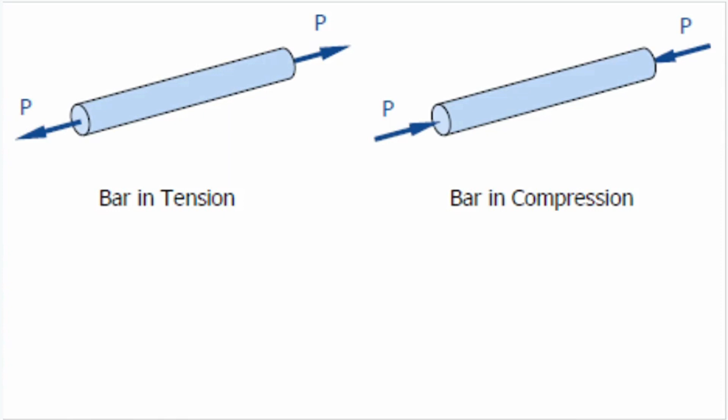But what's buckling? Buckling refers to the sudden and often catastrophic failure of a structural component when subjected to axial compression. This phenomenon is encountered in a variety of mechanical systems, from thin-walled structures to columns and pressure vessels. Buckling can be characterized by sudden deformation and large displacements.

The deformation that buckling can cause does not always result in yielding or fracture, but buckling is still considered an important failure mode to consider, because once a member buckles, it is unable to support the load it was designed to support.

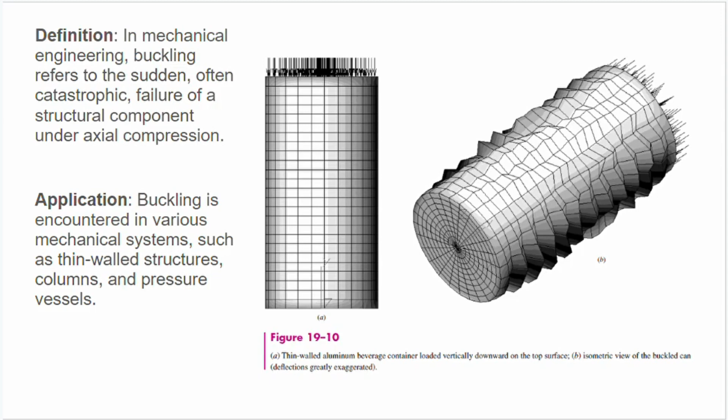Train tracks can buckle in high temperatures because as the metal expands axially, the tracks are constrained, which applies a compressive reaction force axially. The train tracks may buckle under this compressive force.

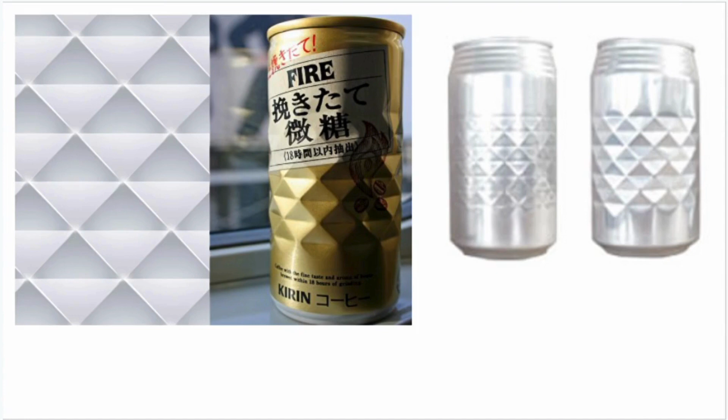Diamond cut cans are manufactured thanks to buckling. Fun fact, due to the equalization of pressure, the pattern becomes more distinct when the can is opened.

The primary cause of buckling is axial compression, where a component experiences compressive forces along its axis. The critical load at which buckling occurs is influenced by both the geometry of the component and its material properties. Additionally, imperfections such as geometric irregularities or manufacturing defects can accelerate the onset of buckling in mechanical systems.

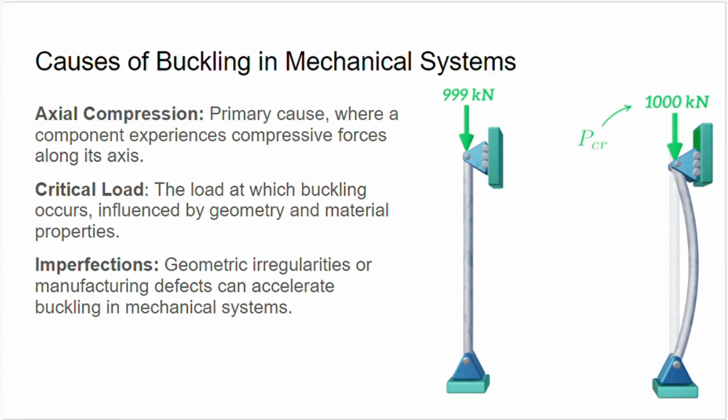Euler's buckling, named after the Swiss mathematician Leonhard Euler, is a fundamental theory in mechanical engineering that addresses the stability of slender columns or structures subjected to axial compression. This theory assumes an idealized scenario where the material is homogeneous, isotropic, and the column is perfectly straight without any initial imperfections.

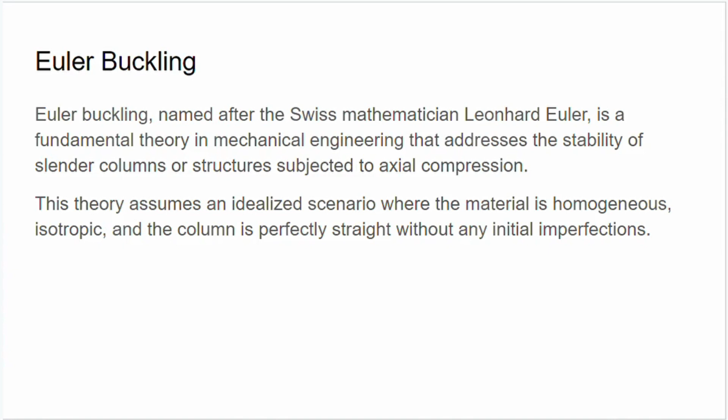Euler buckling critical load formula. The critical load, P critical, in Euler buckling theory, is determined by the formula P critical equals pi squared times E times I over K times L squared, where E is the modulus of elasticity, I is the moment of inertia, K is the column effective length factor, and L is the length of the column.

This formula is pivotal in Euler buckling theory as it defines the point at which a slender column transitions from stable to unstable equilibrium. We use this to ensure mechanical components are designed with sufficient stiffness and material strength to prevent buckling under expected loads.

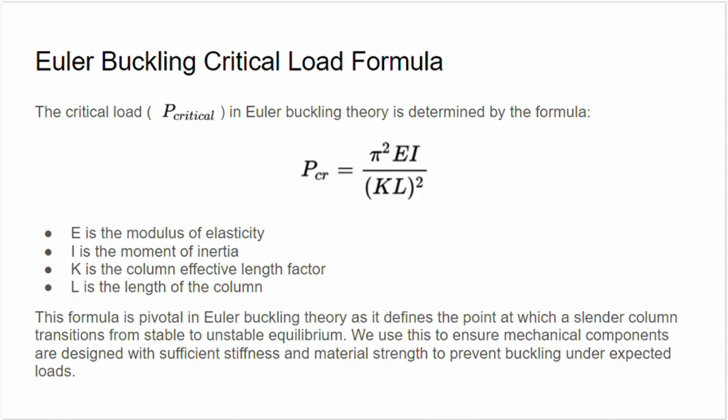But what's the effective length? The effective length, LE, is the distance between inflection points on the deflected shape. For the column with fixed and free ends, the distance between inflection points is twice the length of the column, so the column effective length factor, K, is 2. End connections make a huge impact on the critical buckling load and must be considered thoroughly.

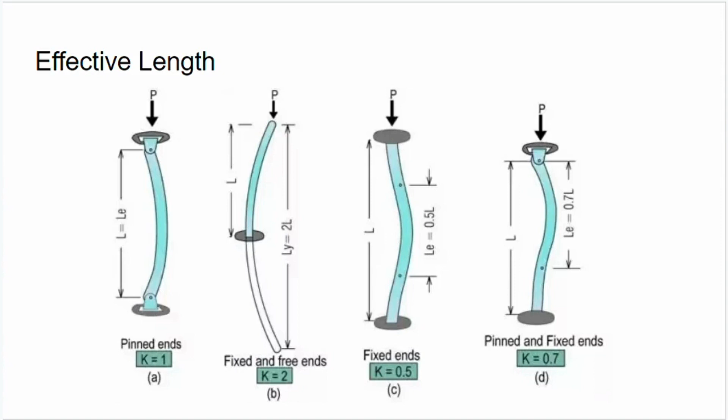FEA application in buckling. As mechanical engineers, the role of finite element analysis, FEA, becomes paramount in understanding and mitigating buckling.

FEA allows us to simulate and analyze the behavior of mechanical components under varying loads, helping us predict the critical loads at which buckling may occur. Moreover, it provides a powerful tool for design optimization, allowing us to create structures that are not just mechanically sound, but also optimized for stability and performance.

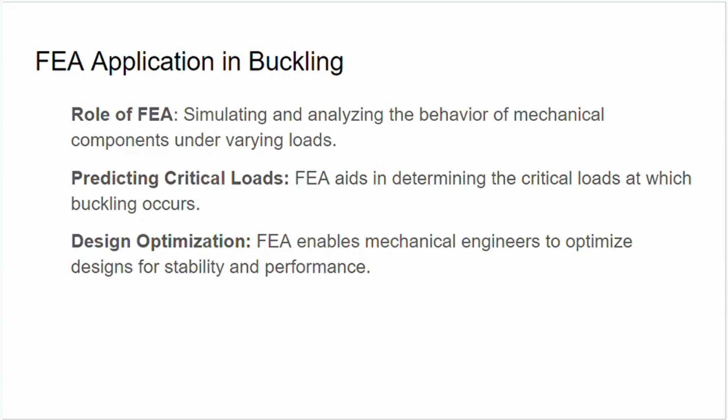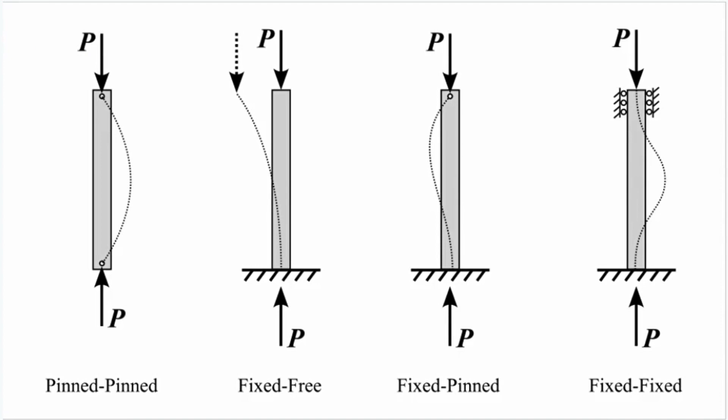So let's see an example in SolidWorks. We will be evaluating the fixed free column in FEA, as seen here, with one fixed end and one free end where the load is applied.

First, you'll make your part. This column is 0.03 meters in diameter and 2.55 meters long. It's a pretty thin column, but it's the one we'll be evaluating today.

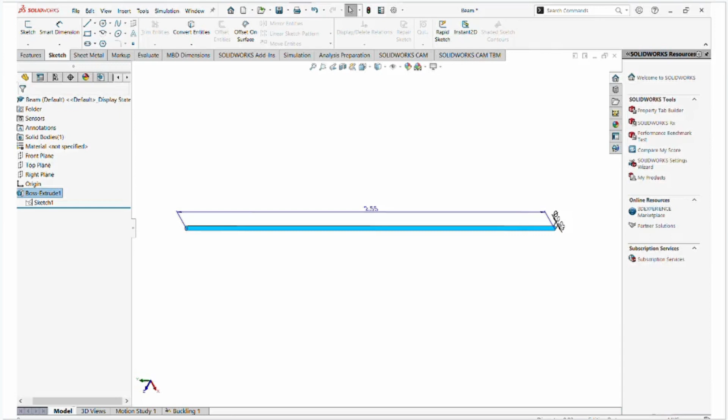You'll then want to create a new buckling study. You'll go to the Simulation tab, click New Study, and then do a buckling study. Click that green check mark.

Similar to a frequency study, we may want to analyze more than one buckling mode because there will be multiple modes that buckling produces. Right-click the study and select Properties. Under Options, you can change the number of buckling modes. In this example, I picked 5. In most practical cases, the first positive buckling mode determines the safety of the analyzed part, which is usually going to be the first mode that you see, but it's nice to see more modes.

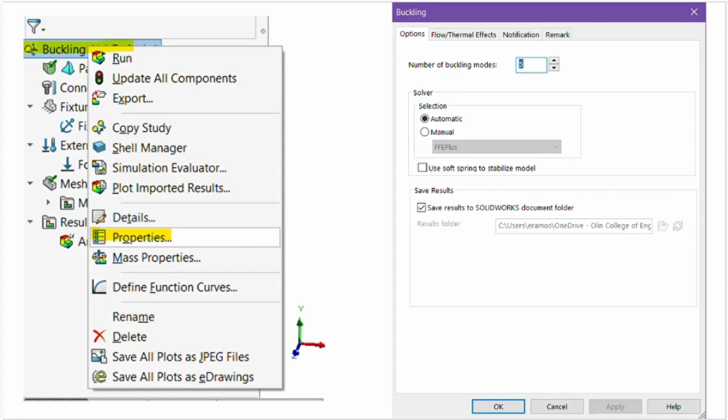Right-click on your part to assign a material. You can find more materials in the Apply/Edit Material menu. Today I'll be using plain carbon steel.

Next, fix the base of the column. Just the fixed geometry on the end of the column will do.

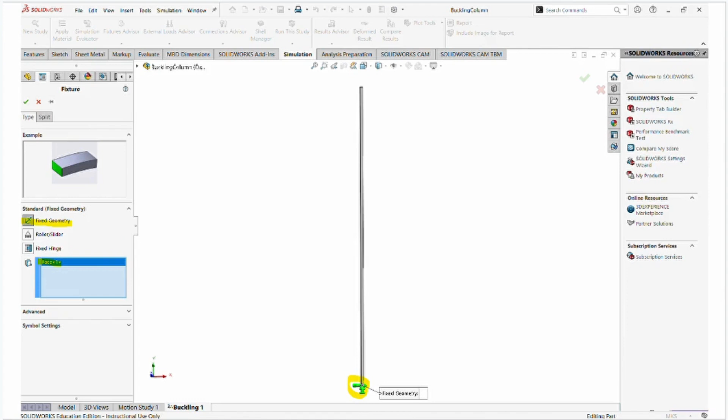Then apply the force to the top of the column. I applied about 10 newtons, which is a pretty small force.

We'll then mesh and run, and you should get the results.

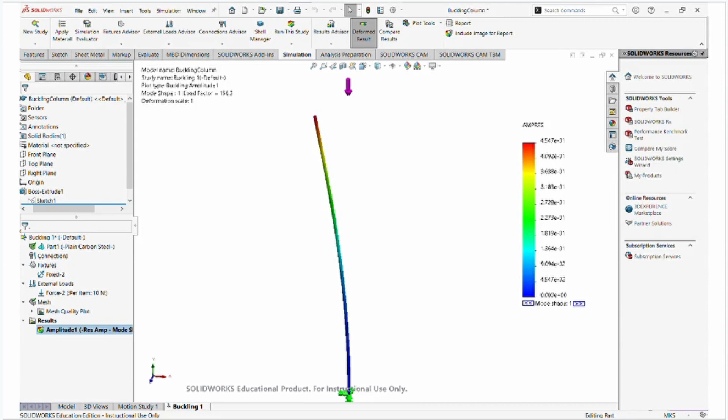You can click through the mode shapes by using the right or left arrow at the bottom of the legend. You should have 5 mode shapes since that's what we selected earlier.

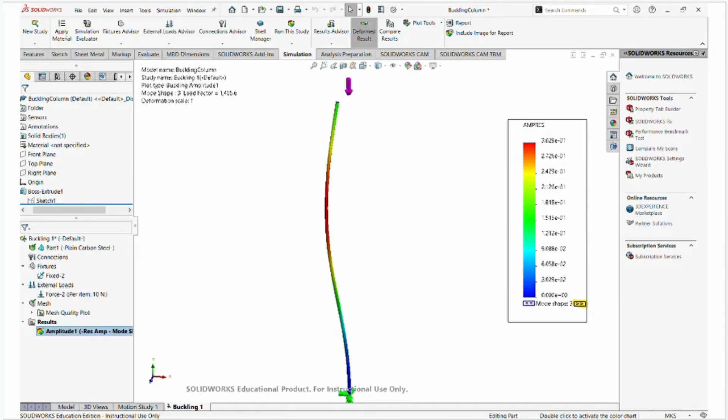Once you have your different results, it may be helpful to right-click the results and go to List Buckling Factor of Safety. These buckling factor of safety values are how much the applied load must be multiplied by in order for buckling to occur for each mode.

So for mode number 1, to find out our buckling load, we'll take that 10 newtons that we applied, multiply that by the 156.3 buckling factor of safety, which is going to be 1,563 newtons. That would be the buckling load for mode 1, which is the first positive mode.

If the buckling factor of safety is less than 1, then the column will buckle.

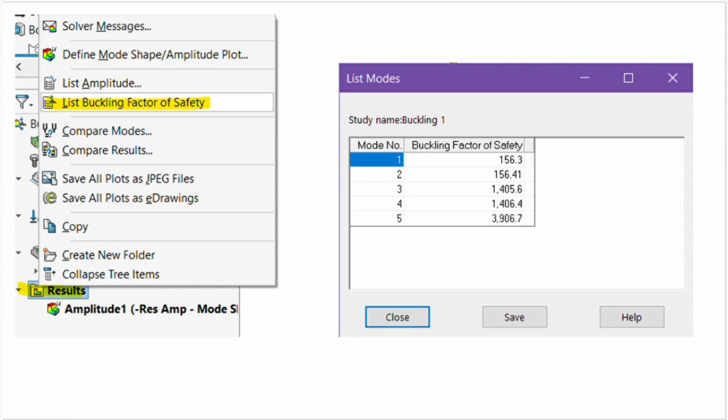Hi! So now we'll be doing torsional buckling in SolidWorks, which is slightly more advanced than before, so I'll be videoing it, so follow along with the video.

This is a surface extrude circle that we're going to do a new study on. Buckling, check. So we're going to make sure that this is treated like a shell.

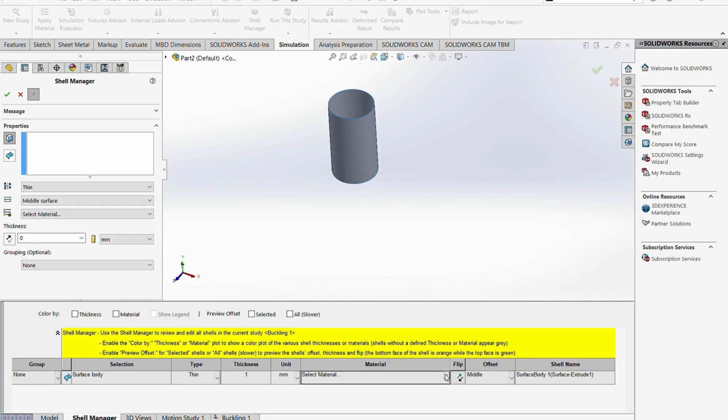Then select thickness, 1 millimeter, material, alloy steel, check. There we go.

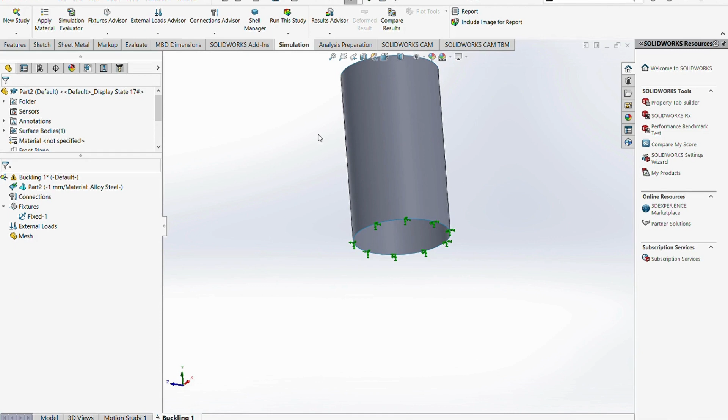So we're going to fix this at the edge, and then we will load it with external loads torque. We'll apply this to the face, about this. That looks pretty good. So now you have torque going around the face and it is fixed on the bottom.

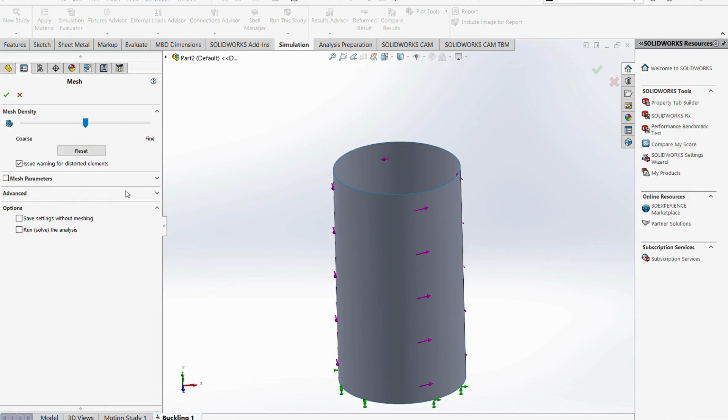We are ready to create the mesh. This looks about right. I feel good with this. Very nice.

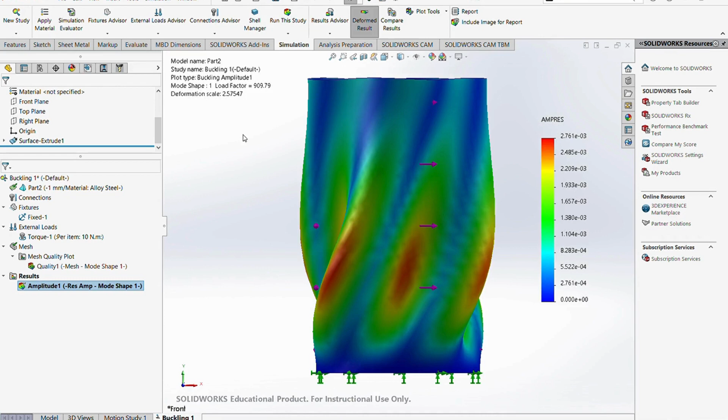And now we can run the study, which should only take a short moment. Here we can see some pretty cool deformation from bending, and if we want to see even more modes, we'll go to Properties, 1, 2, 3, 4, 5, click OK, and run it again. It should still be pretty quick, so you'll get multiple different mode shapes now.

Very, very cool. Then you can check the results, list buckling factor of safety. So our first positive result is mode 4, which is at 909.

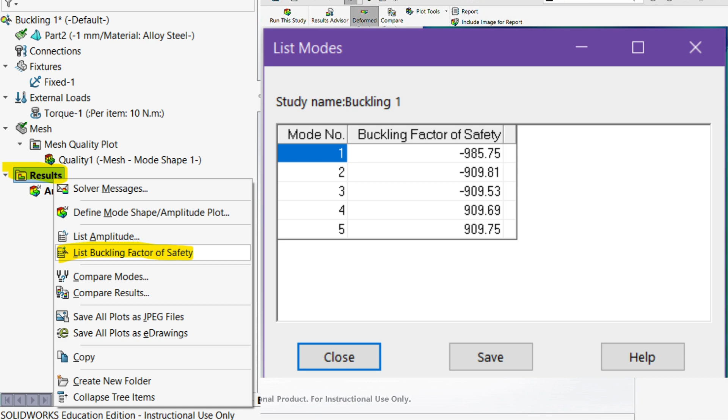So this shell loaded with 10 newtons is going to be okay. We'd need about 9,000 newtons of force to see buckling with this piece. So that's great news for us and our 10 newton loaded topless soda can.

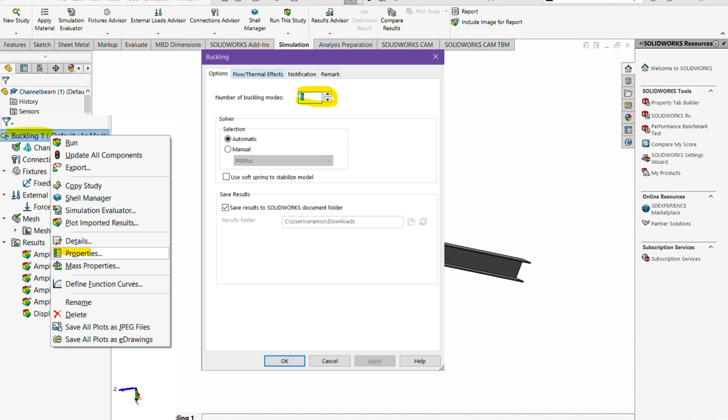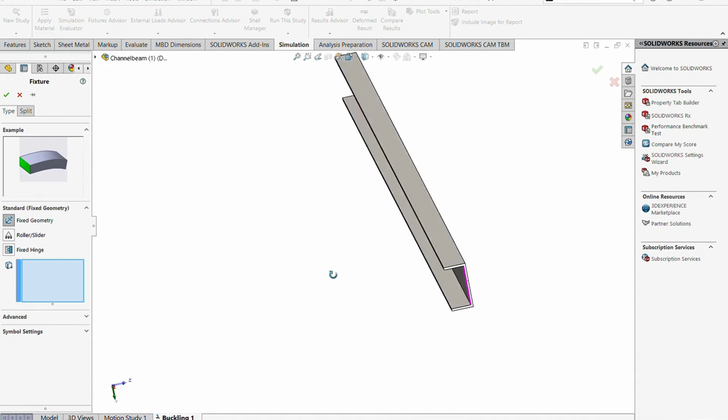We also want to make sure that this is a solid body, which it is. We will then fix one side of this beam. I'm going to just fix this face. Very nice. Fixed.

Then for the other side, do external loads, force, and a pretty hefty beam, as we'll say 30,000 newtons.

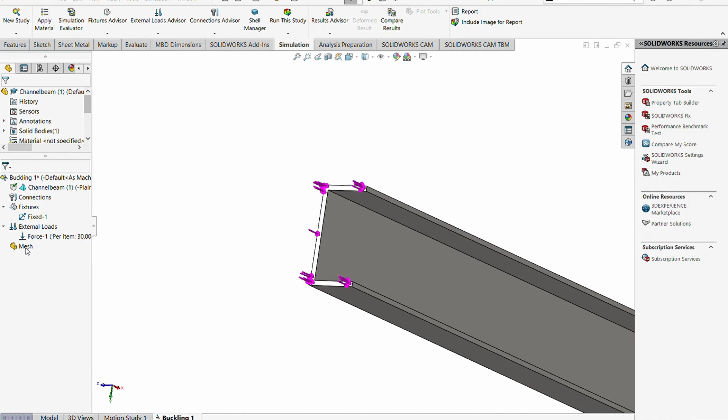Mesh and run. Beautiful.

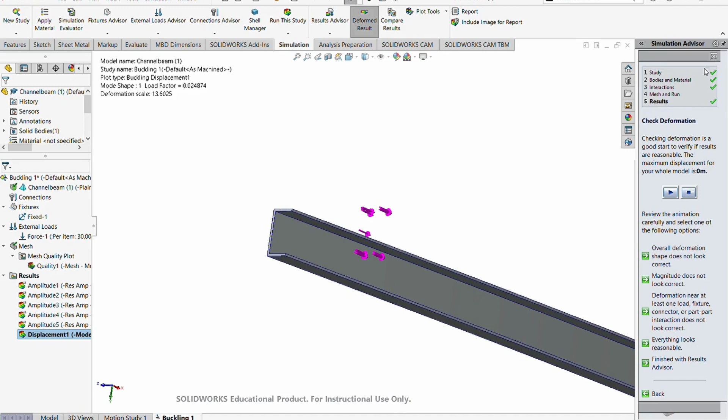See the notes. Alright. 1, 2, mode shape 3, 4, 5. So we can look at these results, right click on the results, and then list buckling factor of safety.